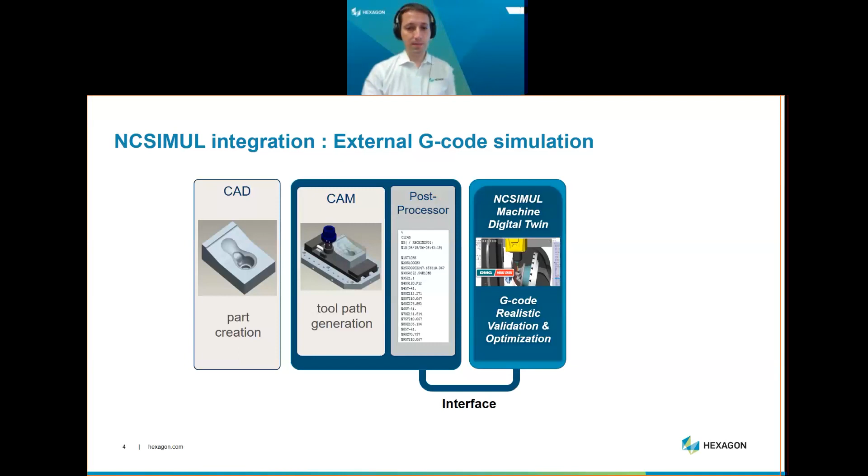And this is where we can provide the missing brick between the post-processor and the final CNC machine. The missing brick is going to be NCSimul Machine, digital twin. We are going to talk about a real digital twin because we are going to have a copy of the real machine inside the digital world.

And this is where within Hexagon, NCSimul is the brick that will connect the real world to the digital world with G-code, realistic validation, simulation, and also optimization of the CNC programs that you are going to run on the machine. And of course, this is also interfaced with the CAD/CAM world to be able to get automatically all the information, all the data that is requested.

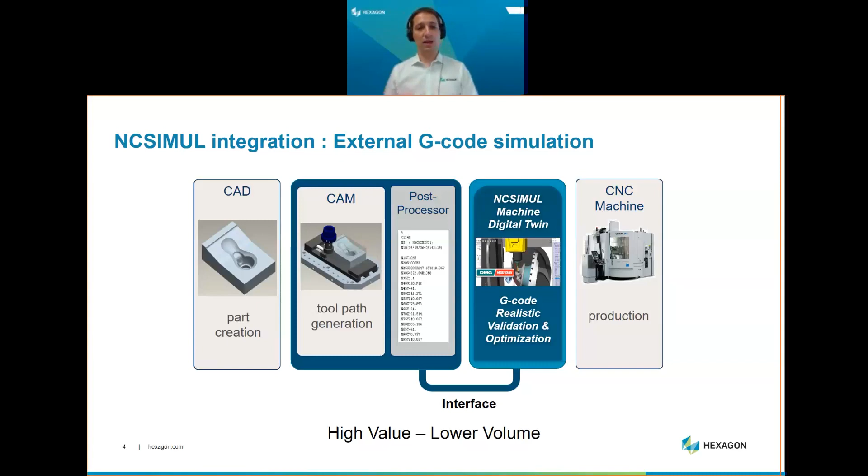What kind of user is using NCSimul on a daily basis today? We have different kinds of users, from SMEs, very small companies using one 5-axis simultaneous machine, a 3+2 axis machine or more complex, and also big groups with more than 100 CNC machines running every day in different markets: aerospace and defense, heavy industry, medical devices, industrial equipment, automotive, consumer products, where we see the molds and dies, depending on the complexity of those machines.

The common link here is that all those customers are using CNC machines and need to make sure that the programs they send to the machines are okay and right the first time. And this is why we decided with Morgan, who is going to be our technical host today, to present you every month one standard machine that you can bring into the programming department to check and validate your programs, and make sure that for your new CNC machines those programs are valid for production.

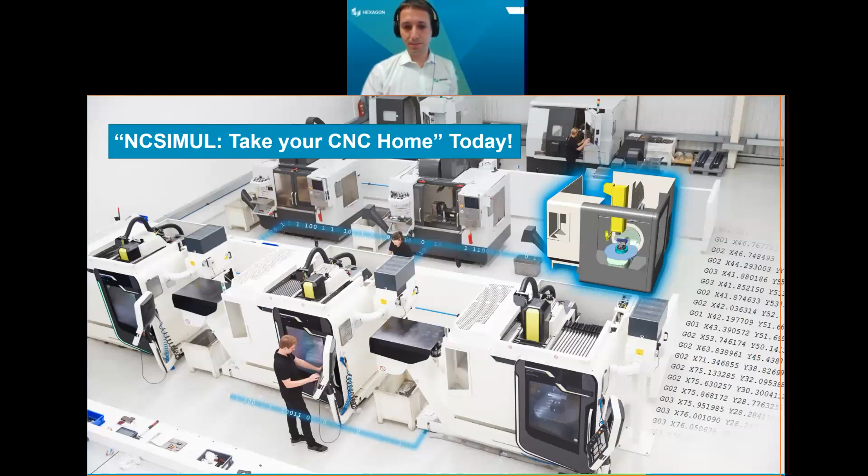And what we are going to have this month is a new DMG DMU50 machine, CMX50U, and the DMU50 third generation, which Morgan is going to explain to us. And regarding the NCSimul integration, from the feedback that we get directly from customers, the goal is to eliminate long shop floor prove-outs.

They are not to go run the machine and keep it only for production, not to have to dry run, not to have to prove out the parts and all the issues that this can bring during the prove-out campaign or test campaign. And reduce the new machine setup time.

Of course, when we want to send a new program to a new machine or a new program to an existing machine, we need to put the clamping system, we need to put the mounting on the table, the rough stock, the cutting tools, everything needs to be ready before providing the first article. Here, what we are going to be able to do is to do it offline, which will, of course, gain a lot of time and gain confidence for lights-out machining,

to have the machines running unattended and as long as possible. Of course, we are going to help on avoiding costly crashes and downtimes. And finally, ensure that each and every one of the programs that you are sending to the workshops are okay without any issues, to push the green button as fast as possible.

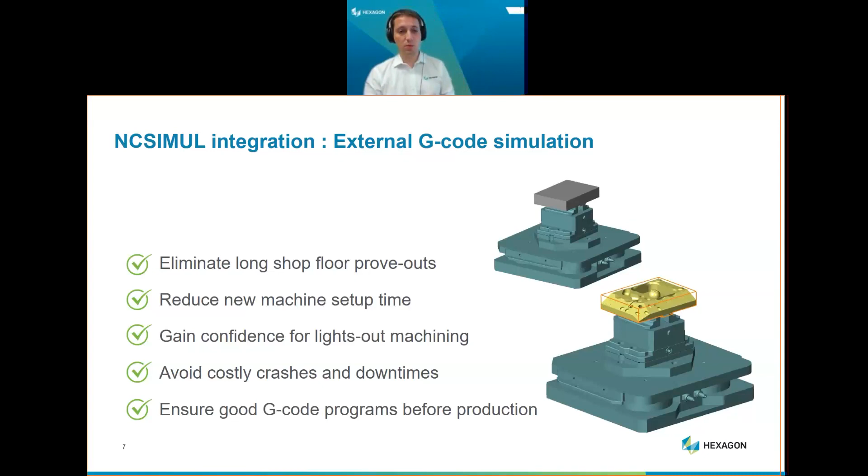Now, to talk a little bit about DMG, I'm going to invite Morgan to explain to us technically what we are going to talk about regarding those, I would say, 2 types of machines. Yes, thank you, Eric.

So to have a few words quickly about the DMG DMU50 here. It's, as Eric explained, a well-known machine. It's a 5-axis milling machine with a rotary table. So the 2 rotary axes B and C are on the table. The DMU50 is quite a small machine, so for small to medium-sized parts, and it's quite cheap. Also, it's the first price on the DMU series.

The CMX machine is also quite close to the DMG DMU, but the CMX is less known than the DMU series. But yes, those machines are quite similar. And so they are well known, and we see them a lot in workshops throughout the world because of their small size and being quite cheap, so quite popular in the workshops.

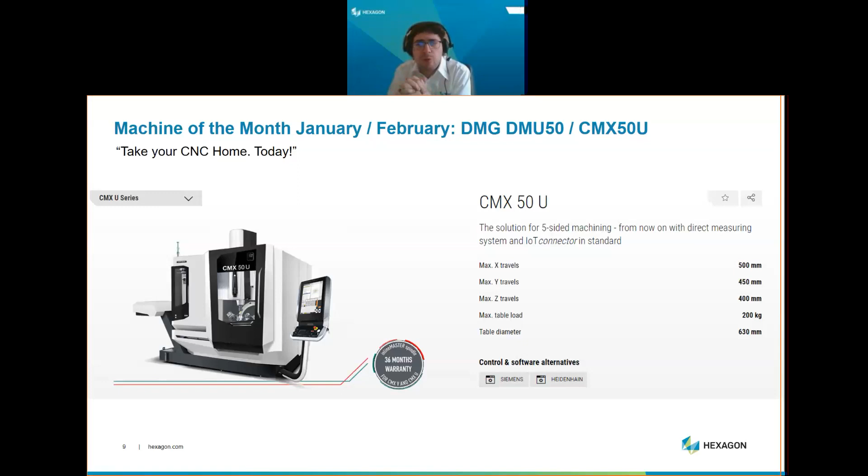And they come with 2 different controllers from DMG Mori, either Siemens 840D or Heidenhain, here TNC 640, for the newest one. And within NCSimul, we can, of course, simulate both of them. So the controller doesn't matter. We will see that later. So that's it for the controller. Perfect. Thank you, Morgan.

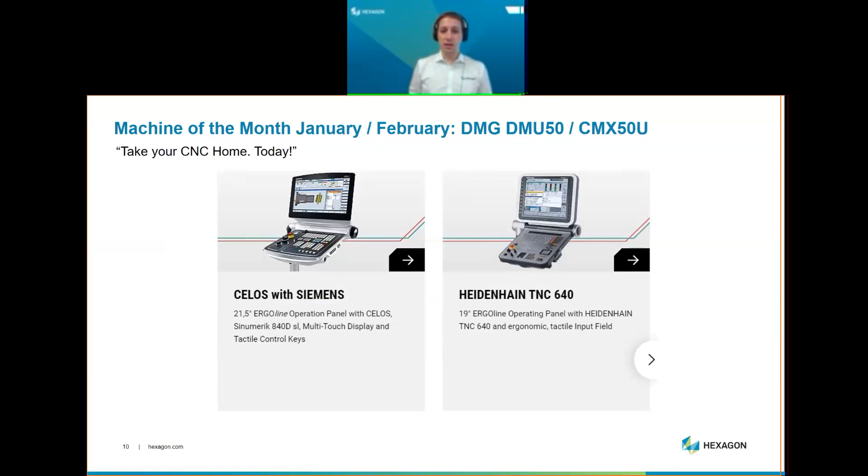So this is important: whether you are using a Siemens controller or a Heidenhain controller, the process is going to be exactly the same to provide the verification of your post-processor and your G-codes out of those post-processors, regardless of the controller that you are using today in the workshop. So this is what we are going to bring you today.

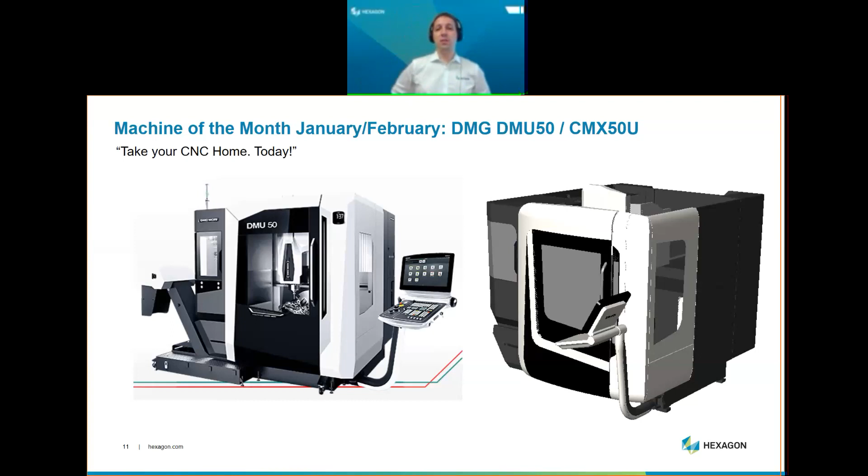DMG DMU50, first and third generation, CMX50U, and Morgan is going to demo the capabilities of NCSimul on a DMG DMU50. What we are going to see here, and the proposal that we have for you today regarding this Machine of the Month offer, is the full power of NCSimul. This is not going to be a downgraded version of the software, but for one dedicated machine tool, which is the DMG DMU50. All the features and benefits that our customers get when they do the 3-step process that we are going to see in a few minutes with Morgan will be included inside this Machine of the Month offer. It means exactly like what the operator will do on the machine.

We are going to be able to provide the NC program analysis, what we call the program decoding, to check if there are any issues within the G-code itself. The simulation module, which is basically the dry run to check that everything is fine regarding the machine environment, the controller information that we get from Siemens or from Heidenhain, machining with the non-cutting portion of the tool, cutting portion of the tool, and so on. So really to remove the material like it would be in the workshop.

And finally, dimensional analysis, which is basically to check and make sure that the part that we output from this machine is going to be okay and checked on the CMM on the metrology side. We are going to be able to check that this part has been manufactured like it was designed under the same tolerances, no gouged material or surplus material, and so on.

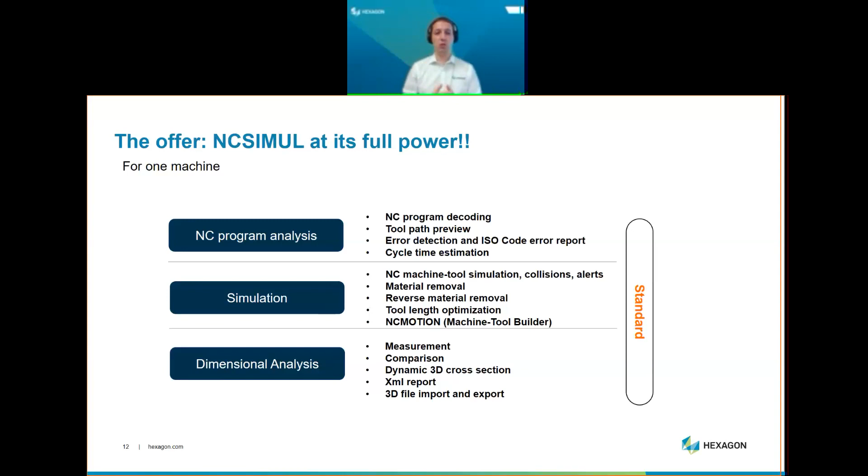So those 3 steps that we are going to respect during this demo, and in the future also all other demos, are going to be provided within this offer. And of course, plus the digital twin that we are going to provide to you inside the software.

There is also a little bit of change here because we are going to make a demo on our reception part. Basically, that is what we call the GP2R. And this reception part is going to test basically all the main functions of your 5-axis simultaneous machine or 3+2 axis to check that they are all being supported.

So we are going to be able to test the basic linear and circular movement functions, tilted planes, 5-axis continuous motions, machining, polar machining, multiple compensation, radius compensation, helical interpolation, and so on. Everything will be within this part so that the machine is robust and can read and check basically all the programs that you will put through.

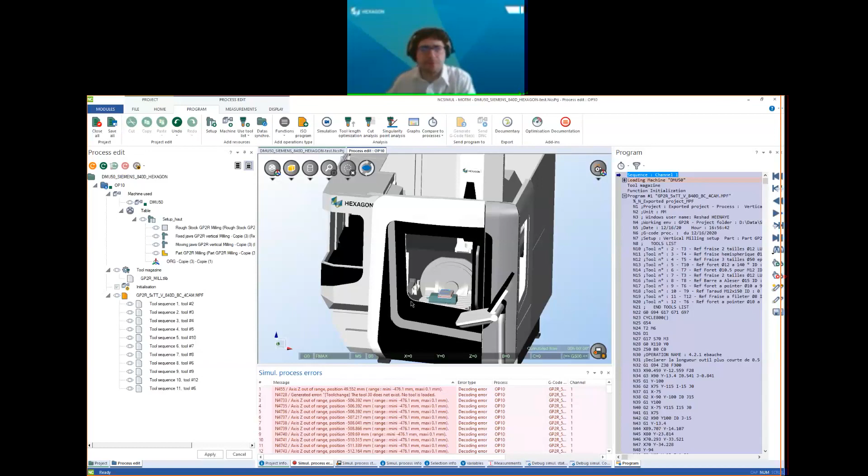So as Eric explained, here we are on the NCSimul environment. For the example, we came from HCAM and interfaced everything directly automatically inside NCSimul. And here it's the state where it comes in. We have our machine here and the 3D model of our DMG DMU50. On the left, we have all the resources of the project. So directly retrieved from the CAM system the setup, which regroups the rough stock, the clamping system, and the finished part, the actual CAD model of our part.

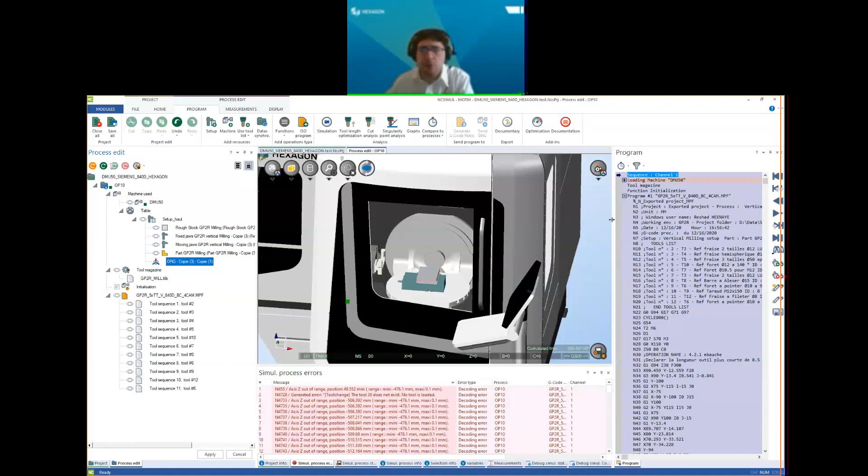Also, the origins. So all the axis systems created in the CAM system will be retrieved with the CAD models. Then the tools, and finally our NC code, which we will also find here displayed on the right. And in this window, I can navigate through my NC code, and as you can see, I have my trajectories and my spindle moving through my part.

But you can notice that I don't have any material removal because we explained that the simulation in NCSimul is in 3 steps. This is the first one, the decoding, and here there is no material removal. It's only reading the NC code. As the real machine will do when you load the NC code on it, it first reads the whole NC code and detects errors, mostly of syntax.

So the errors that we will find here will be either unknown codes or forbidden functions, unknown functions, or out of bounds. So here we have some out of range, for example, on the Z-axis. It can be out of speed of the spindle. It will be some errors on the tools or the axes, all this type of error that the machine can find before the material removal. So this is step 1 of the simulation. And the goal here will be to fix all those errors to be able to move on and go to step 2.

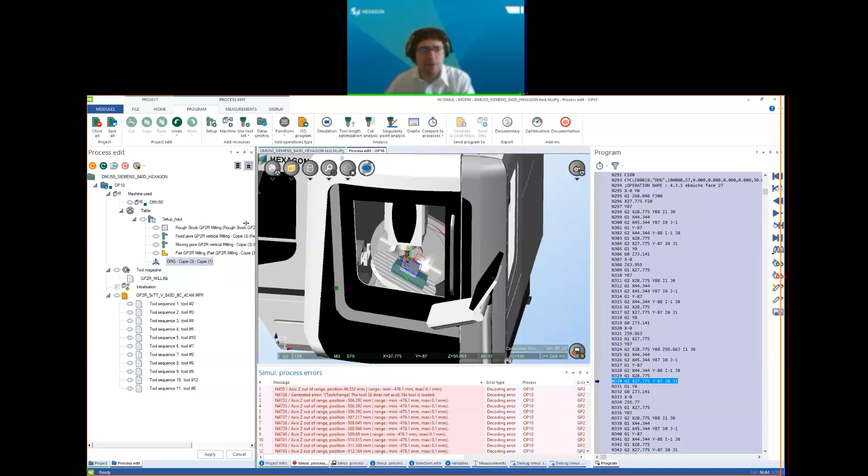During this presentation, we will see all the functions that are available in NCSimul, because as Eric explained, through this campaign, you have access to the full NCSimul functions, and we'll try to check on all of them. So we will fix the errors of our NC code because there are some and that is not good. We want to be able to send a right NC code to the machine.

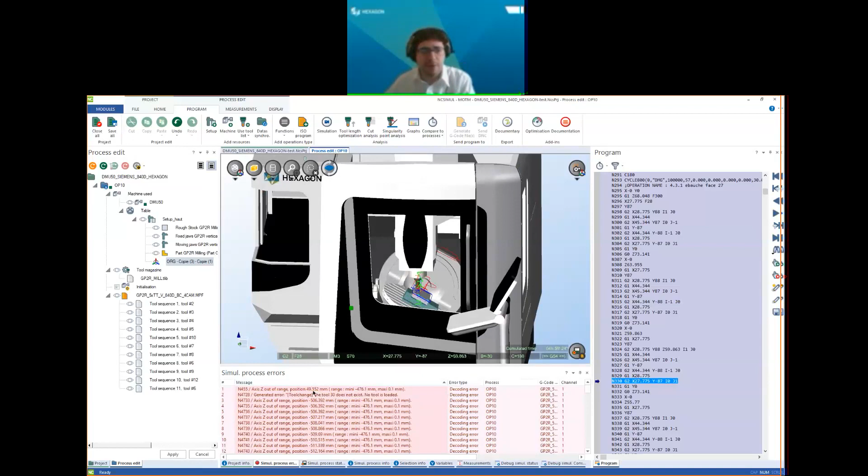So to do that, we just click on an error. In NCSimul, at all times, all the windows are synchronized. So when I click on one, all the others align with it. So here I click on my error and my NC code and my 3D window show me where the errors happen. And as you can see here on this retract, we are too high. So we have an out of range on the Z-axis, 50 millimeters too high. So we just move down the retract just a little bit.

To do that, we have a tool within NCSimul that is the editing mode. I will enter this mode and I can there modify my NC code freely. So what I can do is change the value of my retract. So instead of going at 500, I will go at 250.

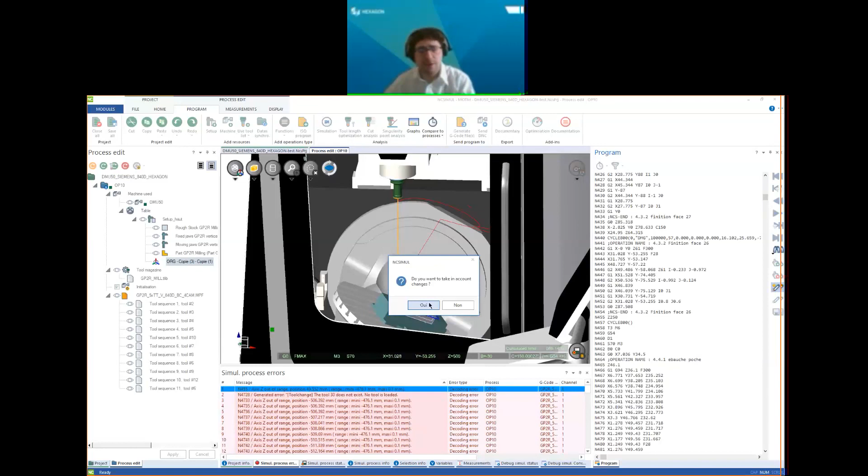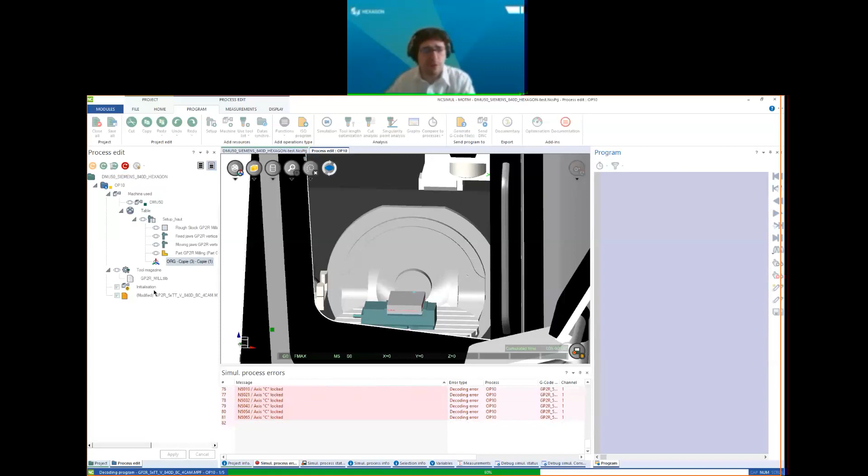When I leave the editing mode, NCSimul asks me if I want to change my NC code, and I say yes. From now on, as you can see here on the left, my NC code has a tag named modified, which means that I am now working on a temporary file that is different from the initial NC code. It's a new one, with my modification, and it's not the initial data. So here I can make any number of changes I want on my new NC code. We won't rewrite the initial one to keep the data.

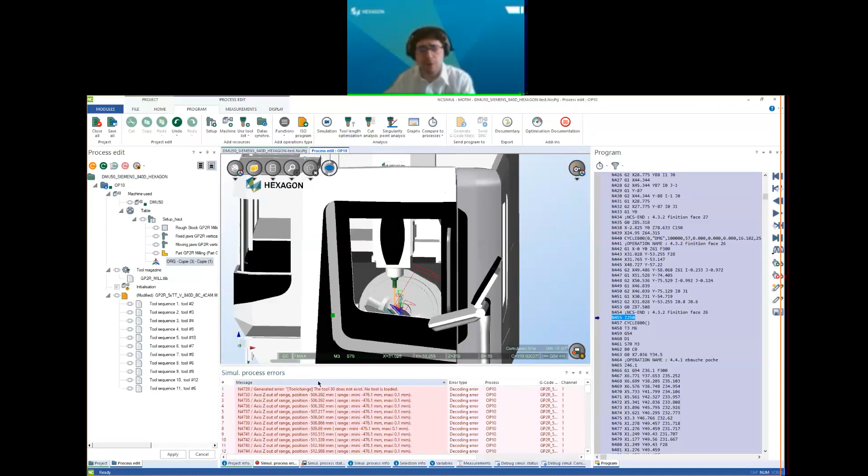But NCSimul reloads my new NC code with my changes, and I can instantly check and see the changes. So here the retracts were too high. As you can see, my first error is now about the tool, and the retract out of range is gone. So we can validate our modification. It didn't trigger another alarm, so we are good. And this way, error after error, we change everything and solve all our errors.

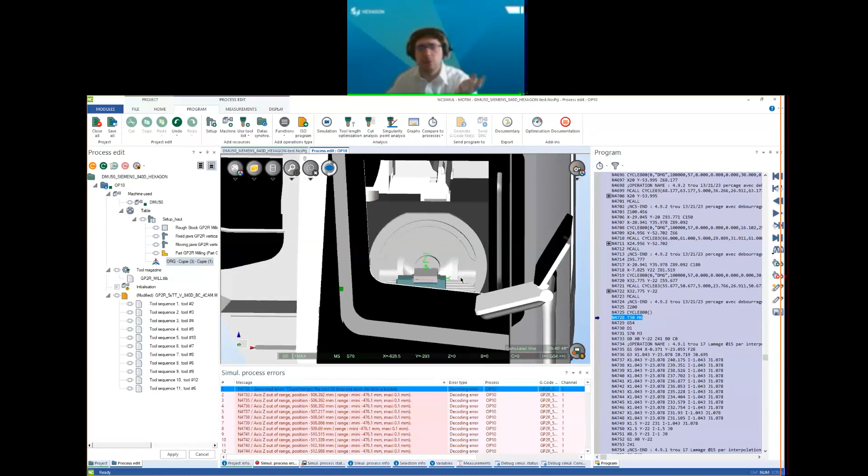The second one, tool number 30 does not exist. So here, I call a tool number 30 in my NC code, and actually in my tool library, the tool number is 3. So there is an inconsistency between the NC code and the tool library. We need to make it right. We either change it in the tool library or the NC code. Here I will modify it in the NC code, the same way I did for the out of range.

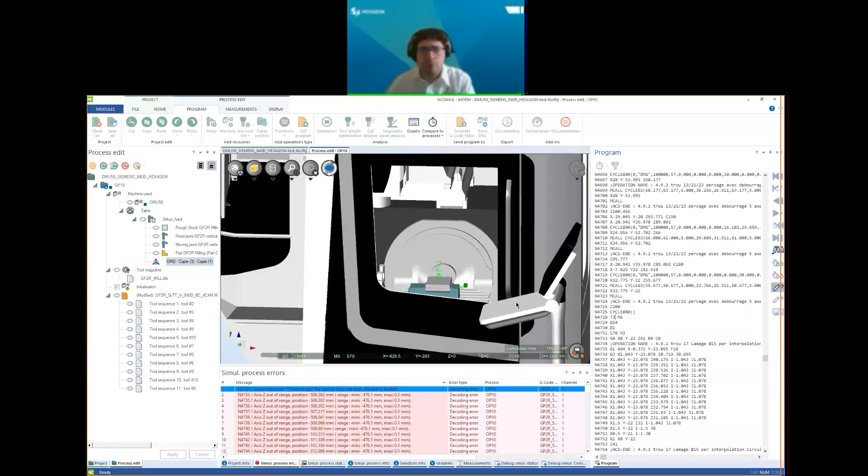I enter the editing mode, change the number of my tool, and reload with my modification. So now I should call the tool number 3, which is actually inside my magazine, so this is fine. My first error was about the tools and now should be gone, and as you can see, it's good. And we can move on to the next error.

So those errors are about the rotary axis. As you can see here, we try to move the rotary axis and NCSimul tells us that they are locked. If we look here before this comment, which is the end of one operation, at the end of the previous operation we locked the rotary axis with those codes, M10 and M22, and we didn't unlock them before trying to do the other 5-axis operation.

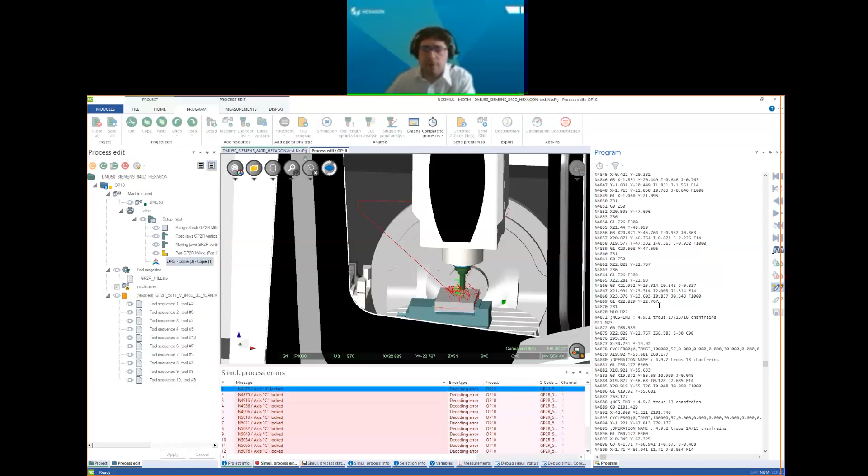So here, what we need to do: either I remove my clamping codes, or at the beginning of the next operation, I unclamp my rotary axis using the codes for that, M11 and M23. And I will reload now with my unclamping code. And now everything should be fine. My last error should be gone. So we let NCSimul reload and verify everything, but here we should be okay. As you can see, we don't have any errors anymore.

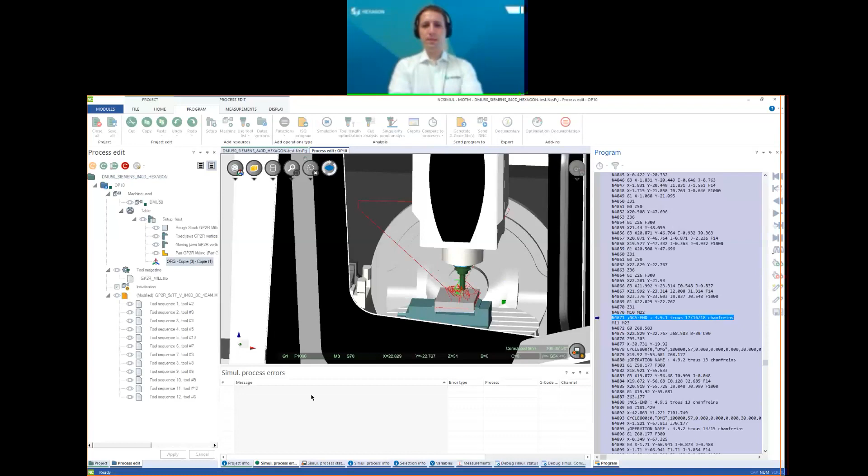The program seems fine. So this concludes step 1 of the simulation, the decoding. The machine read the entire NC code. It looks okay, and we can move on to the next step. Thank you, Morgan.

So this is a very important step, and this is why we separate verification and simulation: once the decoding is done, we don't need to go back to it, and then we can start the simulation. Like the operator would do on the machine, I take my part, I put it on the machine, and then I dry run. I check this part. The only difference is that we are going to do it offline, and it's a little bit better to crash the machine on pixels here in the software than on the real machine.

So this is where this part of verification is important, because if you do it directly on the machine, then the machine is idle, waiting for correction, and you are going to have back and forth travels between the programming and the machining department.

Here, it's also very important that, as we can see on the right, you can directly key in or change the NC code from the window that Morgan just showed us, and check in real time what it does in the real world. So this is also a very important and informative tool to understand what is going on on the machine when I change this parameter or that parameter. And this goes, as Morgan said, to step number 2, where we are going to make some chips and remove material.

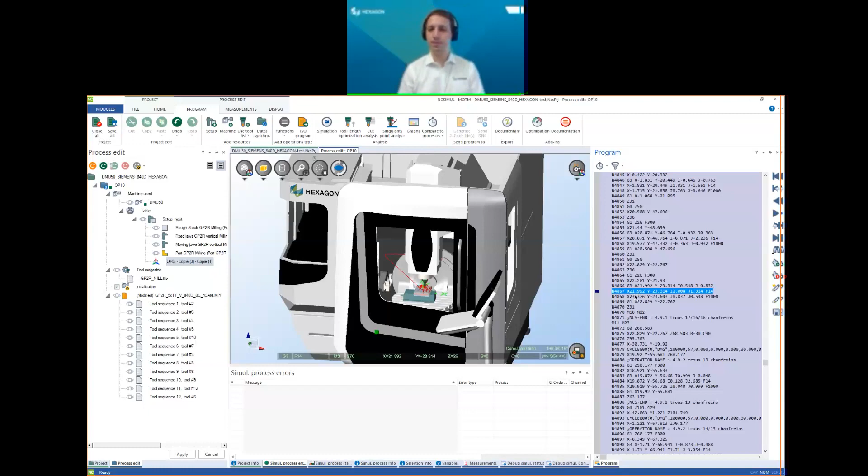So now we can move on to step 2. Step 2 is the simulation or material removal. Here we have the simulation mode, we can enter it, and the simulation is pretty straightforward. We have a play button, we just press play, and the simulation will go on to the end.

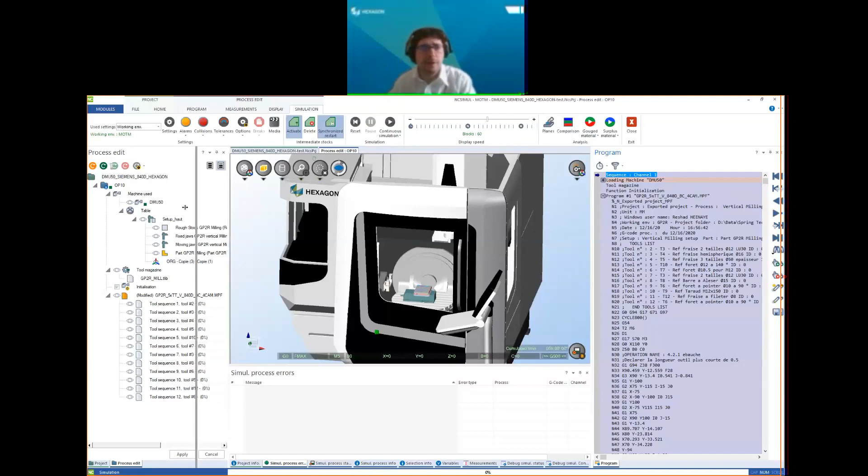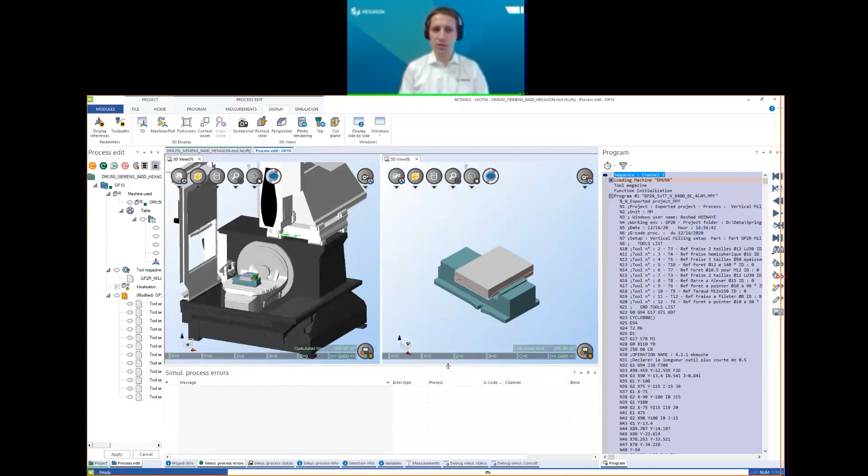I will add a new 3D window and see the machining go on the part. I will hide the door of the machine so we can see the spindle moving and all the movements. You can customize your environment to see what you wouldn't see on the real machine.

Yes, in NCSimul we can modify all the 3D windows. You can switch between machine view and table view, and have multiple 3D windows, that's okay. For the 3D models of the machine, we deliver them according to customer wishes, since everyone has their own needs. Some people like to see the doors and steel flanges of the machine, some just like to see the minimum. Everything is fully customizable, and we change it all the time.

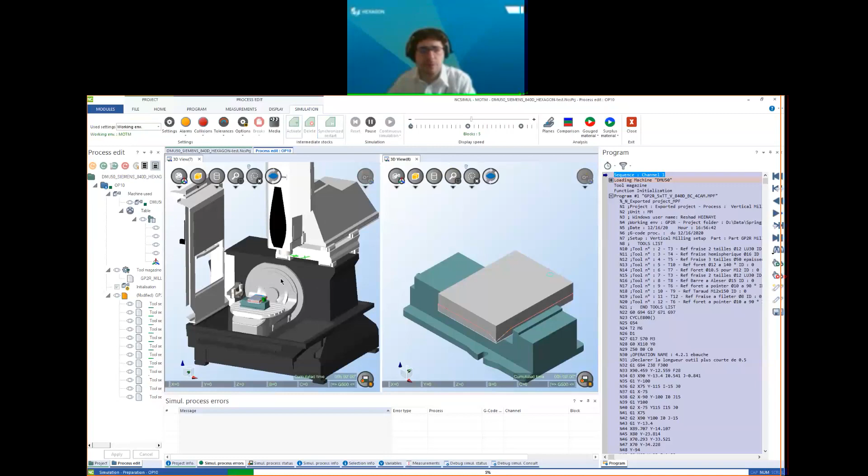Now I will just press play and we will see the simulation. All the windows will be synchronized when the simulation starts. Here I will hide the trajectories. We have the NC code running in both 3D windows, and as I said, it's pretty straightforward.

Here we have a speed bar, we can speed up or slow down the simulation. The simulation will go to the end until there is an error, and that will be displayed here on the bottom.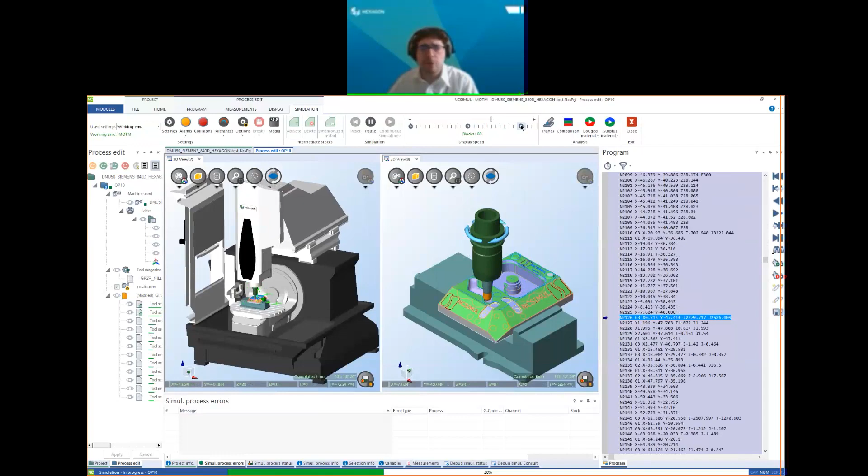I will speed up the simulation to show you: after the end of the speed bar, after this small cross, we are in end result. Here it means there is no display anymore, we don't check anything on the display, but NCSimul will calculate the simulation much faster, and we will just have the report of the errors at the end.

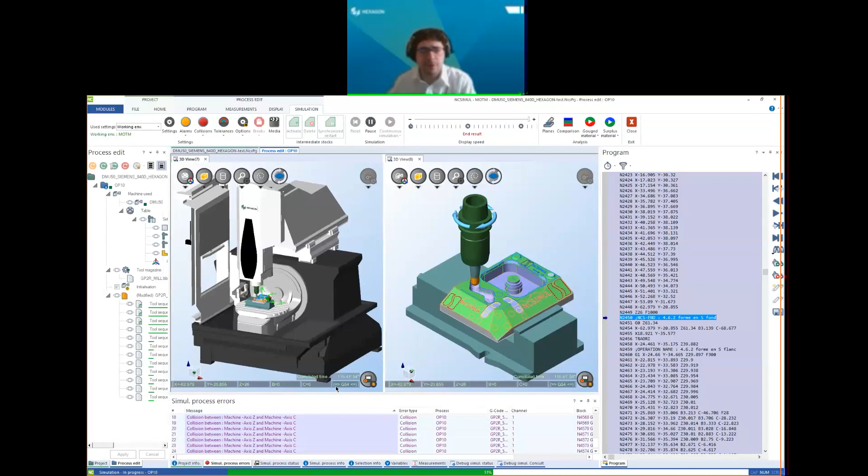So this is what we do. Here we can already start seeing some errors at 50%. You can slow down the simulation to check on it, or speed up again, or just let the simulation finish at once. You can move the 3D window during the simulation, that's okay, it does not trigger anything. Just wait for it to finish.

After this, I will also show the second simulation mode, which is the break option simulation, in which instead of going to the end of the simulation, we stop on every alarm. That's easier to solve all the issues.

So here we have lots of errors at the end. The more errors you have during the simulation, the longer it takes, so that's why at the end it slows down, because we have lots of errors.

So yes, here NCSimul is removing all the material and checking for all those issues during the machining. We can see that the 3D window is not moving, it's to get the result faster as end result, as Morgan just explained.

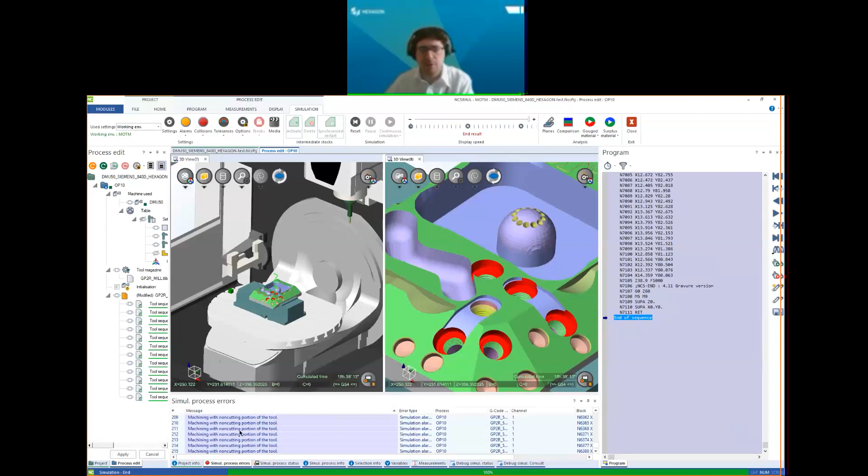So here we have the final result of the simulation and the report of all the alarms. We have over 200 errors, that's way too much. You can see directly on the rough stock the red areas, which means we have a problem. So probably this is machining with non-cutting portion of the tool. I will go back to the first error, and the same way as step 1, error by error, we will fix our NC code to have a machining without any errors.

Just as a reminder, during the simulation we detect two types of errors: the collisions, shown here in purple, and the alarms, shown in blue. The collisions are collisions between elements of the resources, the project - so either the tools and the table, or the tools and the fixtures, or any elements that can collide with each other and trigger a problem. NCSimul will display that.

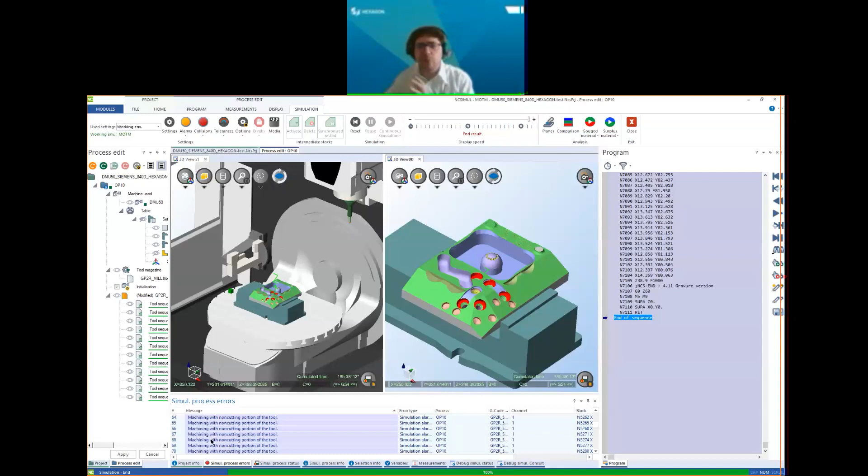And for the alarms, it will be more machining issues - it could be stop spindle in the material, it could be G0 rapid motion in material, or machining with a non-cutting portion of the tool. All those types of machining issues will trigger a problem on the machine, but they are not collisions.

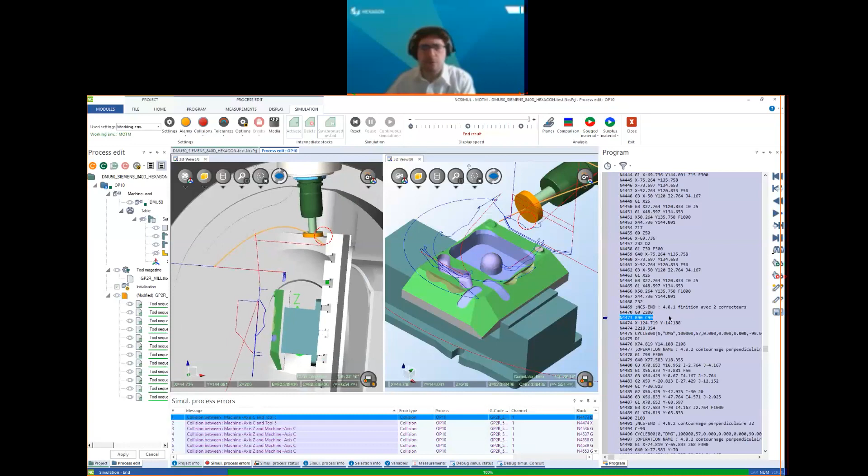So same way as I did for step 1, I will click on an error and see what happens. So here, if I show my toolpath, as we can see here on this move, we move the rotary axis, and our tool collides with the table here. So that's not good. And here we have the same issue, but instead of the tool, it's the spindle that is actually going on the table.

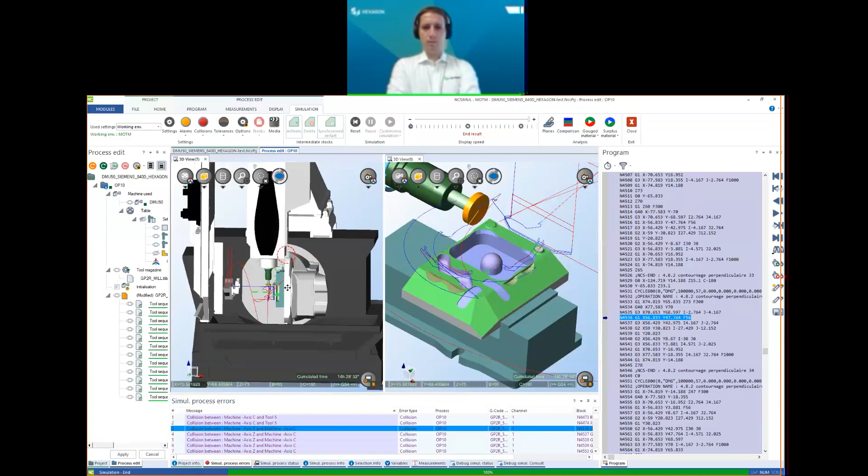So why does this happen? It's because here on our setup, the clamping system is too low on the table. If we were a little bit higher, the tool would go over the table, and that wouldn't be a problem. And here, if we were higher on the table, the spindle would have an offset with the table, and the machine would be good.

So here we need to change the clamping system. We are too close to the table for the spindle, and that's not good. So we can do that quickly within NCSIMUL. I will just close my simulation first.

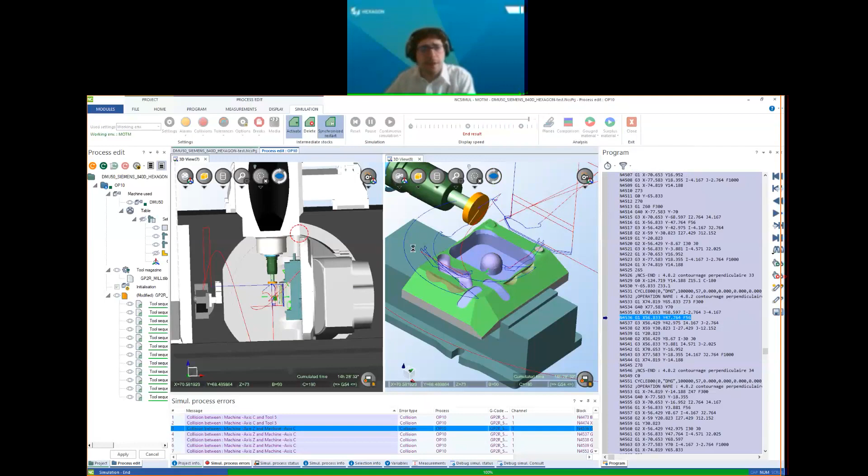We have already imported in this project the new setup, the new clamping system we will use. We should create a new one, but here it's already created. That's what I wanted to say. So here I will, sorry Morgan.

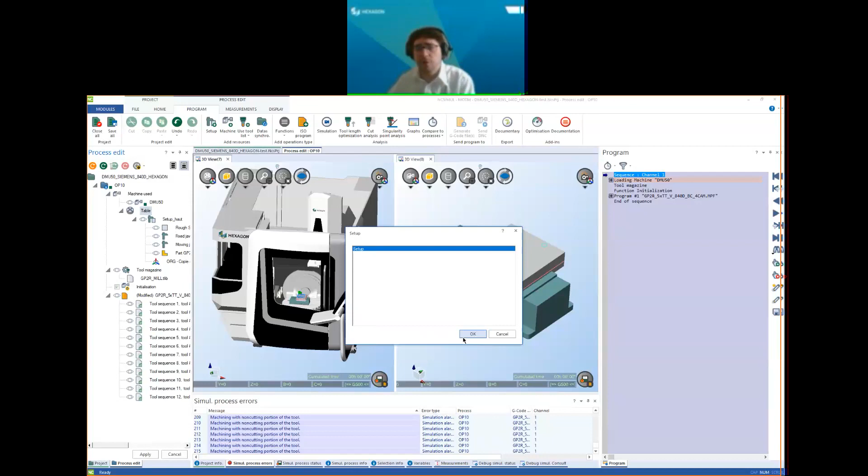How many setups can you define here? So here I have the list of all the setups of my project. I have only one, and the one that is already ready. And we could have any number of setups here. So I could define 100 setups if I wanted, it's the same.

So here I input it on my table, the new setup. I will remove the previous one. And as you can see, we have now a much higher setup, much higher clamping system. Only thing we need to do is update the origins because the axis system was on top of the part here, and now the part is higher.

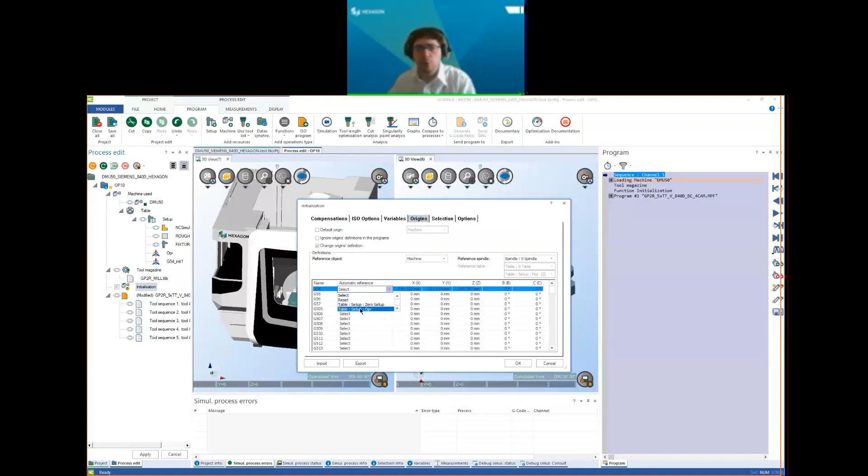So as I explained earlier, all the axis systems are retrieved with the CAD models of the file. So here, my G54, I just need to update it with the new models. And here, NCSIMUL will reload with the new origin.

And we should have the same machining, but at a higher height. We'll let step one reload because here, the new setup could trigger, for example, since we are higher, a new out of range. And NCSIMUL just reloads step one to verify that everything is fine. Everything is good. We can go back to the simulation.

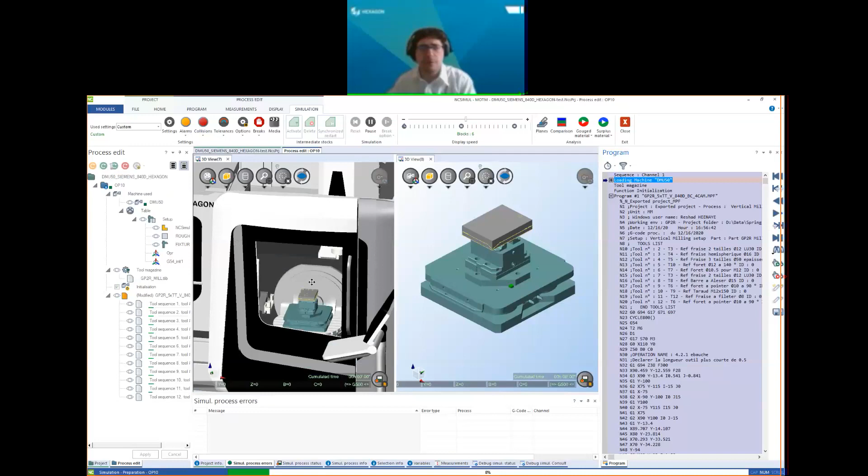For this simulation, I will use the break option, as I explained, the simulation that will play until there is an alarm. So the same simulation, I can zoom in, same simulation, we see everything. But I will just go to the end result as before. We'll run everything and wait for the alarm. The simulation will automatically stop on the first alarm and show me what happens.

We'll wait for it. The first alarm was the collision between the tool and the table, if you remember. We solved this normally, so we should go over it. And we will wait for the next one to show up on the list.

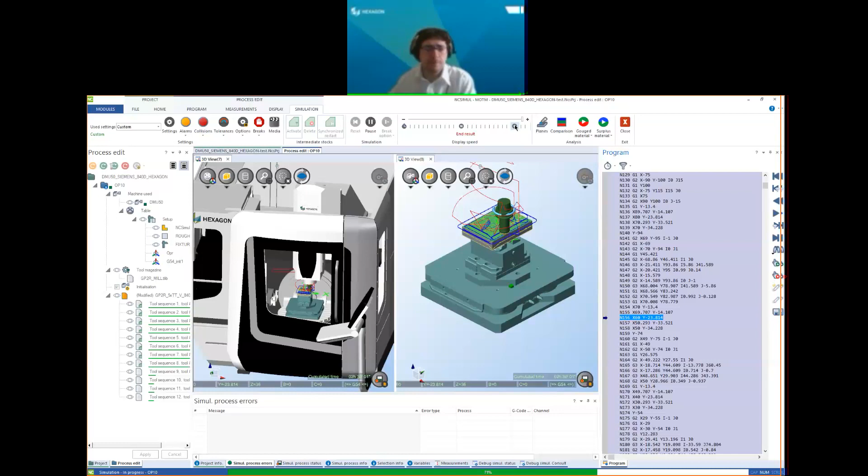Here, we have the next error. So here we have machining with a non-cutting portion of the tool, so we can check what happens. So here, the threading and the holder goes inside the material. Okay, so this is why we have machining in red. And to avoid that, actually here the problem is that the tool is too much inside the holder. We need to update the tool length under the holder of the tool.

To do that, with NCSIMUL, we have a useful function called tool length optimization. And this function actually calculates the minimum tool length under the holder needed for this machining to not trigger any alarms, collision, or anything.

NCSIMUL gives us a table here for each tool. At the moment, the current tool length under holder that we have for each tool, and the minimum needed. If we reduce the value of the tool under holder, we reduce the vibration on the tools and possible breakage or any issues that could happen with it. So that's a good option for us.

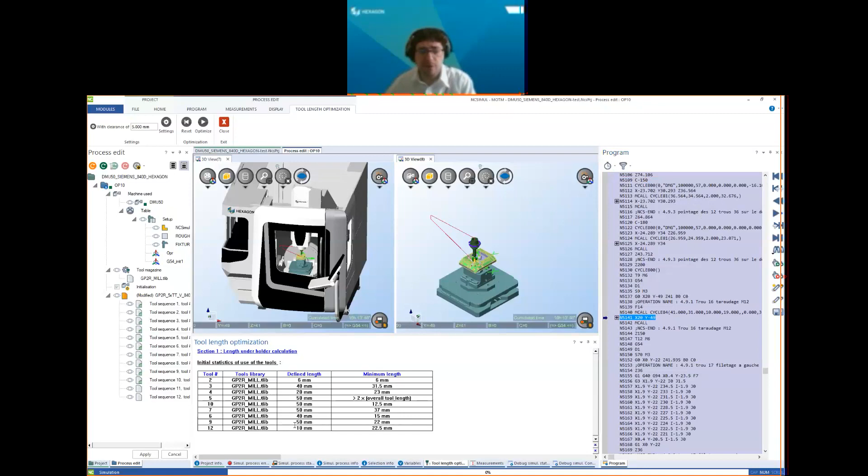For example, here, our tool number 9, we define it at 50 millimeters, and we actually only need 22 millimeters under holder. So we can reduce the forces on the tool by reducing its tool length.

Okay, so we could update this tool length, for example. And the tool that triggered our alarm was the tool number 12. And as you can see, we defined it at 10 millimeters, and the minimum needed is 22. So here we have less tool length than needed. So we need to change it up.

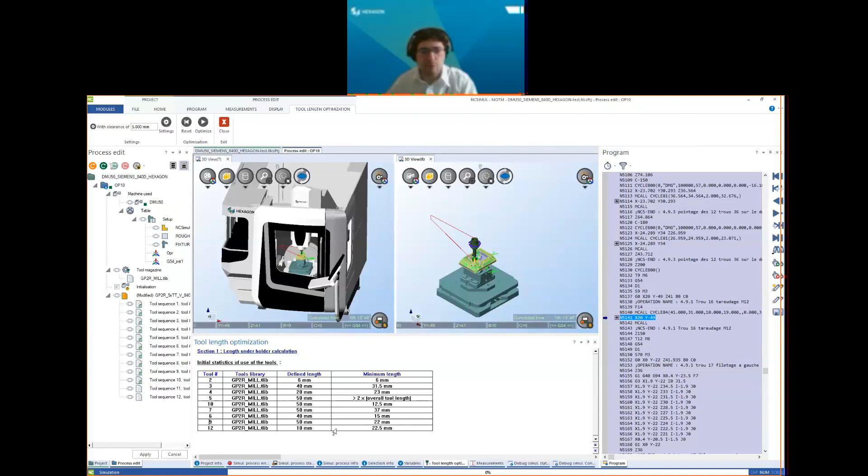So to do that, I will modify my tool. So I will modify my tool number 12, okay, to be above 22.5. So I will close this function.

This function does not update the tool library automatically. It's just a reminder. You are free to change your tools or not, as the programmer and the operators feel if they need or not.

We'll enter the tool library and modify our tool number 12. This was our tool that is too much inside the holder. Inside the tuning function, we have length under holder. We need to be above 22.5 millimeters, so I will set it at 30, and I will also update my tool compensation, adding 20 millimeters to it.

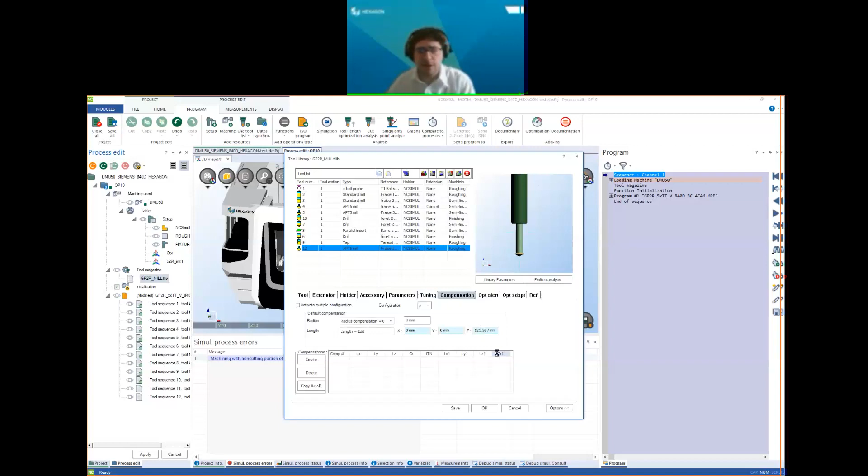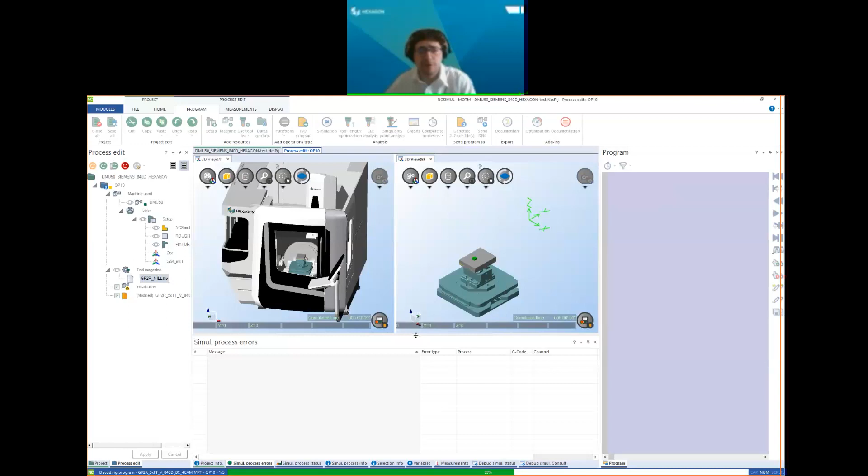I will save my tool library, update my project with the new one. Here, NCSIMUL will reload everything one more time to check if there is any error with the new tools, and we will be able to go back to the simulation. One more time, if there is no error, everything is good.

Simulation. And we start again with the break option. So here the simulation will run until there is an error. If there is none, it will go to the end. That's really so I will keep the break option, the end result, to go faster.

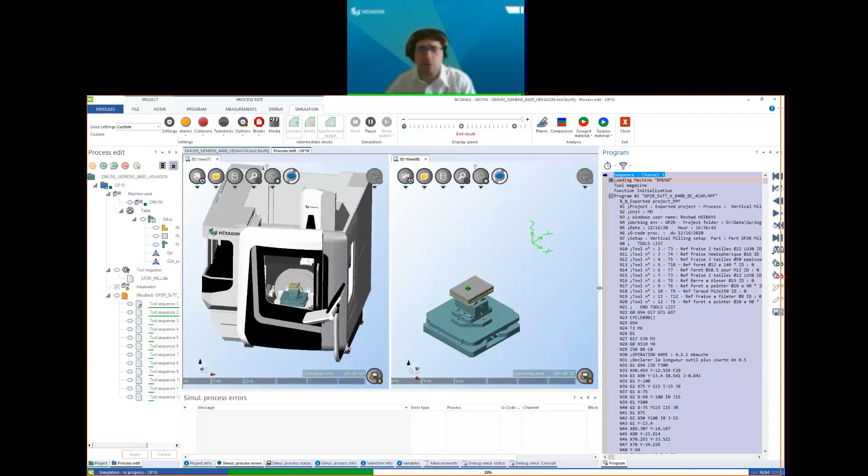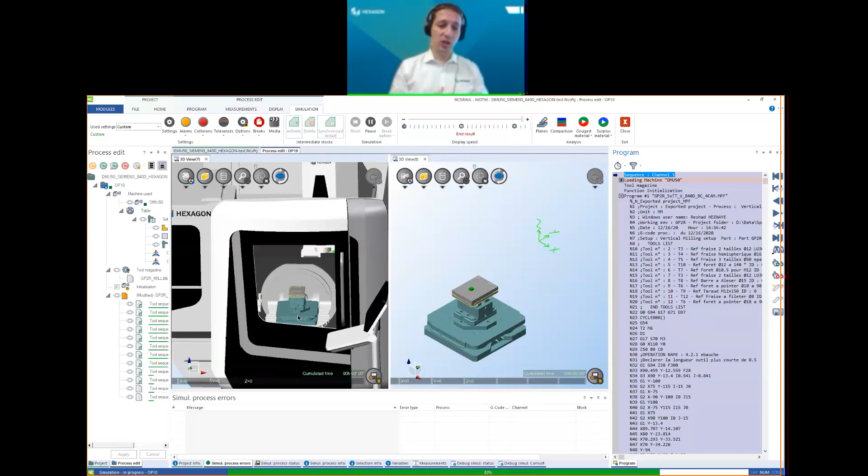Just to finish that step number 2, where the operator would have machined this part directly on the machine: we know that at the end of this step, the program is right for machining. It's okay to go on the machine and push the green button, because one, there is no decoding error, which is a very important point, and two, there is no errors or issues related to the machine environment, the controller, or the cutting tools and so on. So at the end of the sequence, my part is okay for manufacturing.

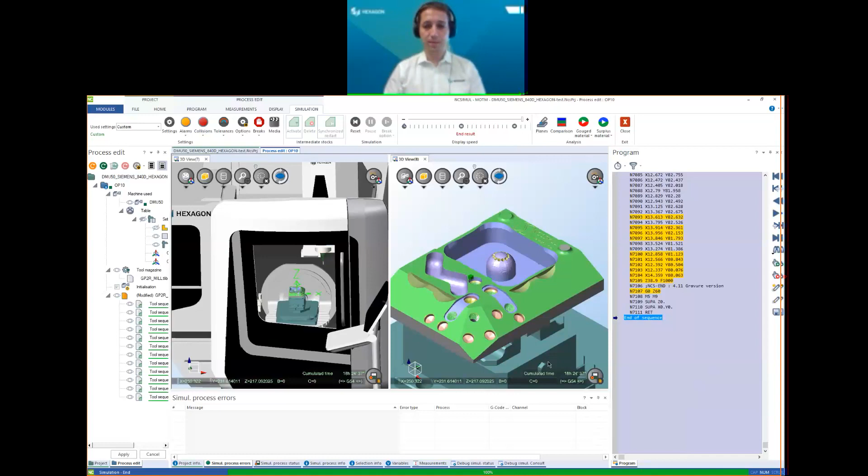Now I need to make sure that this part is okay to deliver to my customer. So this is the third step that Morgan is going to explain. Yes, exactly. So here we have the finished stock that we have machined. There is no error, no collision, no alarm. So as Eric explained, we are ready to send it on the machine.

Now what we want to do before sending it to the machine is to know if what we have machined is right or wrong. This is step 3 of the simulation analysis. We will analyze our machine stock to verify if we are good and close to the CAD model or not. To do that, here we have the CAD model in yellow, and the simulation will compare the actual CAD model of the part with the machined rough stock. This is the first function we have to analyze our machining: the comparison.

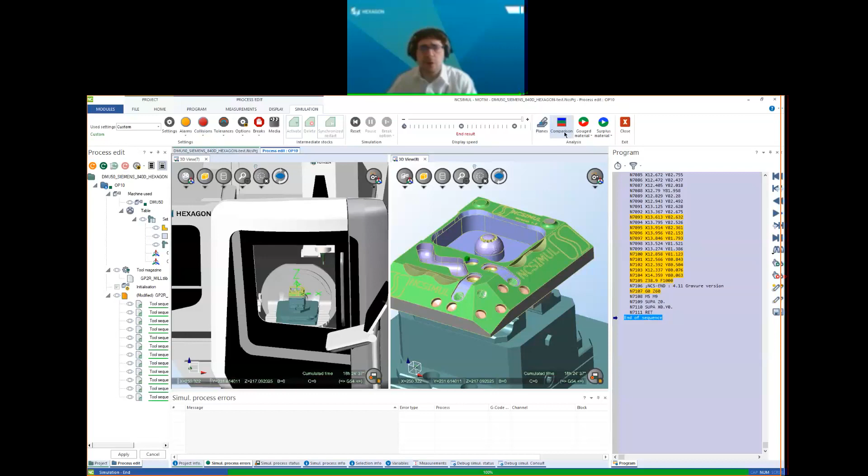When I click on it, I have a color scale function on all my parts, and I can see in blue to green the surplus material on my parts, and from green to red the overcut. I just have to select an area I want to know, for example the overcut here. I can double click on it, and NCSimul gives me the value of my overcut. Same with the surplus material, for example here. That way I can define which areas will be right or wrong. Am I inside my tolerances? Is 0.4 within the tolerance I have for my part or not? That way I can give the status on my part, right or wrong.

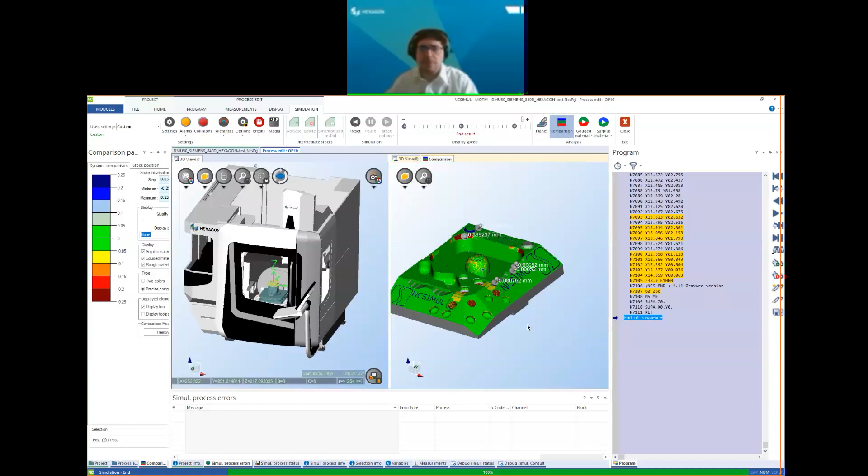This function is okay for small to medium parts, but if you have a really large part, you don't want to go over 2 meters of the part by double clicking on all the surface. So in those cases, we also have two other more specific functions for more specific needs, for example large parts, which are comparisons for only gouged material or only surplus material. Each one of them will detect only one side of the material, and they are more specific, so the calculation will be longer.

There is a new simulation with higher tolerances to have higher results, and NCSimul gives us a table of all the points and all the lines in the NC code where we have either gouged or surplus material. We can click on them, and the 3D windows are synchronized, so you can detect where you have your surplus or gouged materials. So those are for more specific needs, but they are present and available here.

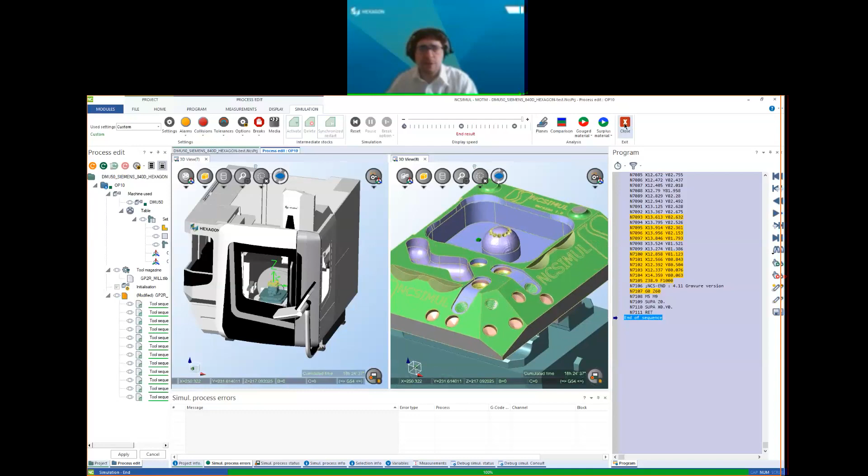And we have also another function that is quite useful to detect any issues on the machining. It's actually outside the simulation. Within NCSimul, we have what we call the cut analysis. So the cut analysis is NCSimul retrieving all the cutting parameters from the machining, since it has all the distances, the tools, everything. We did the simulation, so NCSimul knows everything, and retrieves all the cutting parameters and gives them to us. The cut analysis is available with NCSimul directly, free of charge, so we will use it and see how it works.

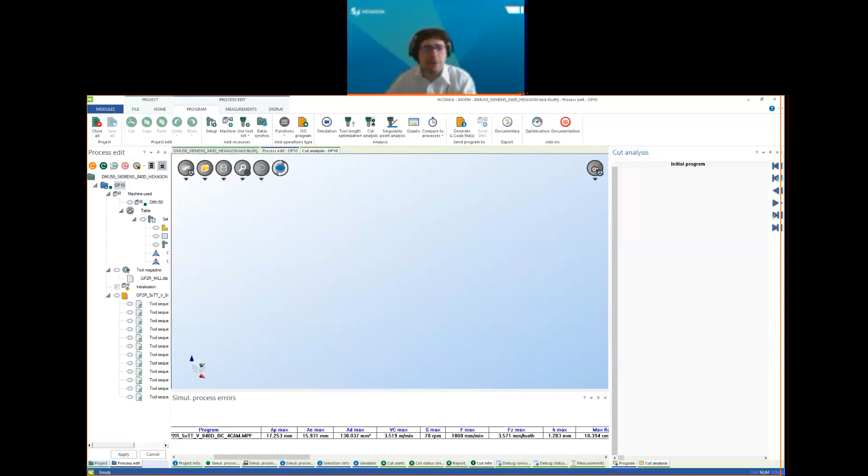As you can see here, my cut analysis, I will run it on one specific tool. I can run it on all my tools, but here I know a particular point that we want to detect on this machine. It's on my tool number 4. So let's imagine that we run. When you put, sorry, tool number 3 in the line, I think. I will check. No, it's sequence number 3, but tool number 4, that's okay.

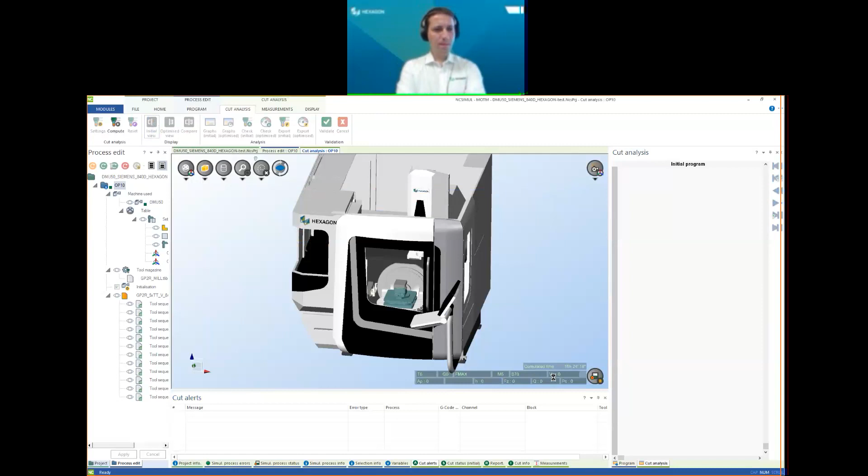Yeah, good point. So let's imagine that we run the program on the machine, and the operators detected that there was too much noise on the machine, or maybe the tool life calculated for the tool was above 10 parts, and you only machined 8 with tool number 4, and after that it breaks. Those types of errors where something is wrong, but you can't actually pinpoint what happens.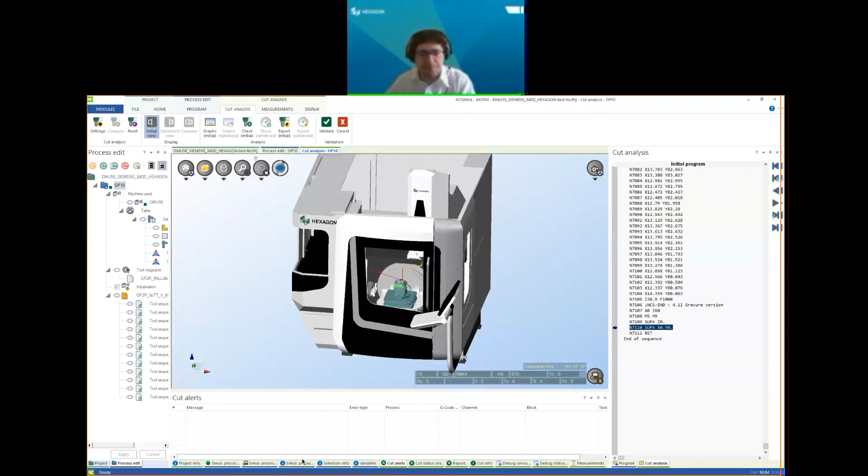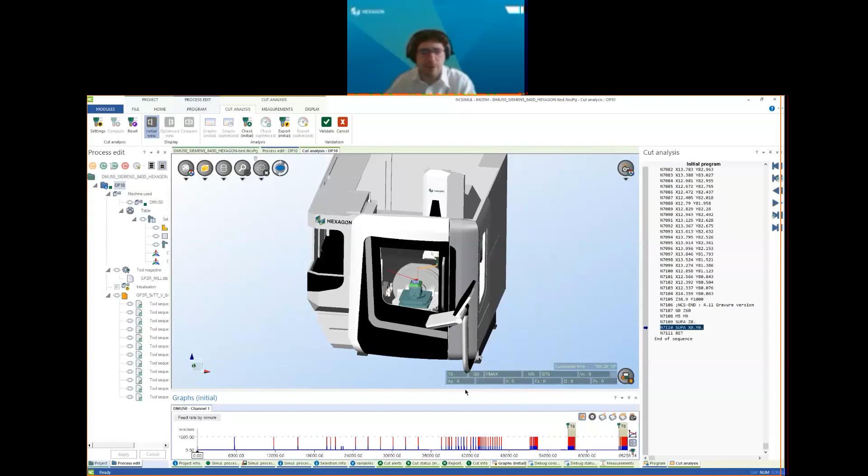With the cutting analysis, we will have all the cutting parameters retrieved by NCSimul, so AP, AE, Q, and so on. Here, NCSimul gives us just the maximum value, but we have a tool here called Graph. We can display those cutting parameters in a graph. For example, one parameter that is quite graphic and can help us quickly find areas of errors is the chip flow of material. I will show the graph of the chip flow.

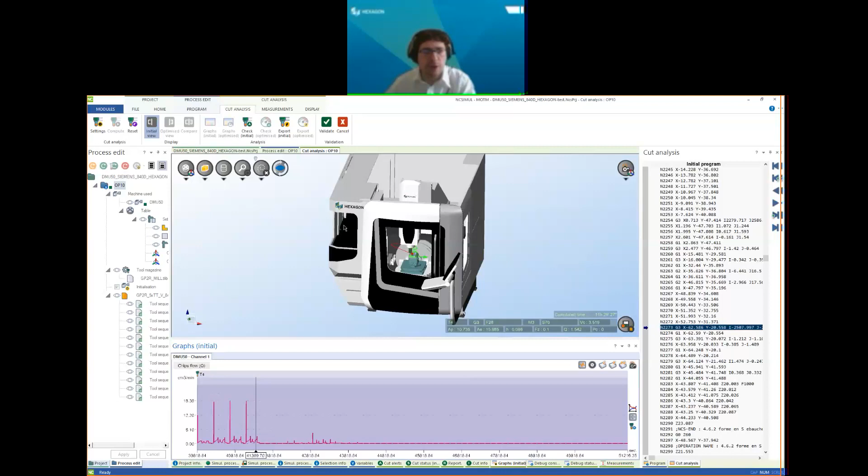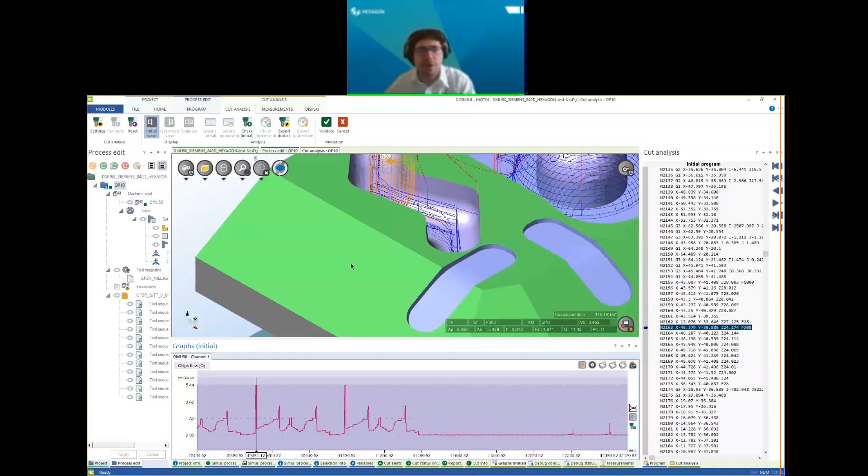As you can see here, the chip flow is constant at maybe 1 cubic centimeter per minute during all the machining. I will zoom on the machining. Every time it's constant here. And every time we enter one of the radii here on the pocket, we have a huge peak of Q, the chip flow, and maybe those peaks trigger lots of vibration, a lot of forces on the tools and on the machine, and this is why we had those issues of tool breakage or noise on the machine.

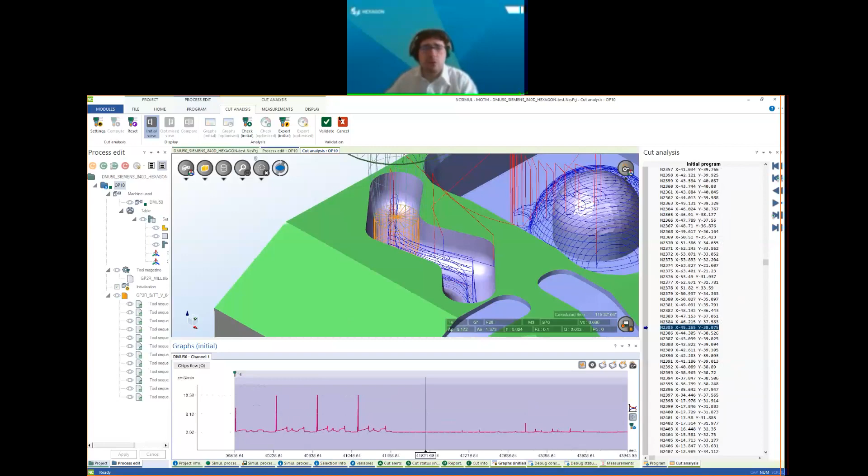Through the graph, we can quickly detect the areas where we have those errors, and maybe think of a new strategy to machine this pocket. Maybe on the CAM system there is another strategy that reduces the feed rates on the corners or something like this. We need to rethink how we programmed the NC code here. This is not a job we will do inside NCSimul, but we can detect it inside NCSimul to change it afterwards and have better machining on the real machine. So this is the cut analysis, and this concludes step 3 of the simulation, the analysis to detect what is wrong on the part and where we have something to change.

And with this, we have seen all the potential of NCSimul and what we can do with our machine of the month. Nice, thank you, Morgan. So yes, it's the end of the 3rd step, which basically gives us all the information, all the tools, and all the experience from NCSimul, from the workshop, and from the programming department to send validated and simulated programs to the workshop.

Now I am here in Siemens 840D. Morgan, if I have a Heidenhain controller, this is not the code that I see in my machine. Is the process the same? Is it working the same way? Yes. As we explained earlier, the machine comes with 2 different controllers. Here I use the Siemens one. You can see here the Cycle 800.

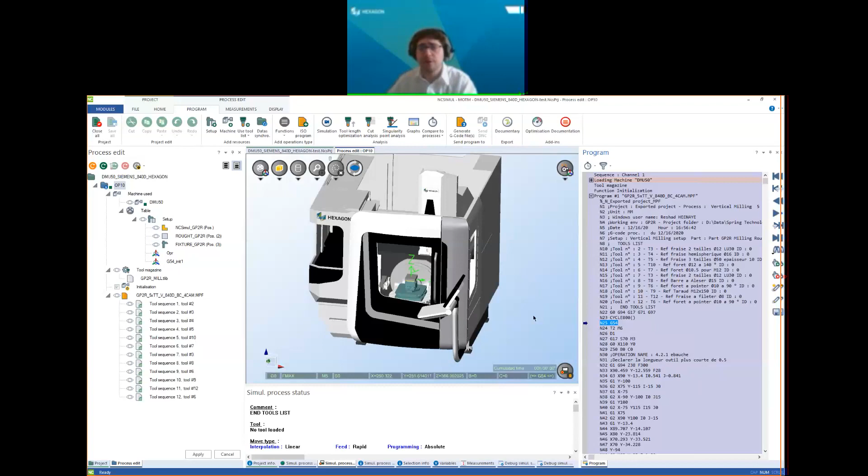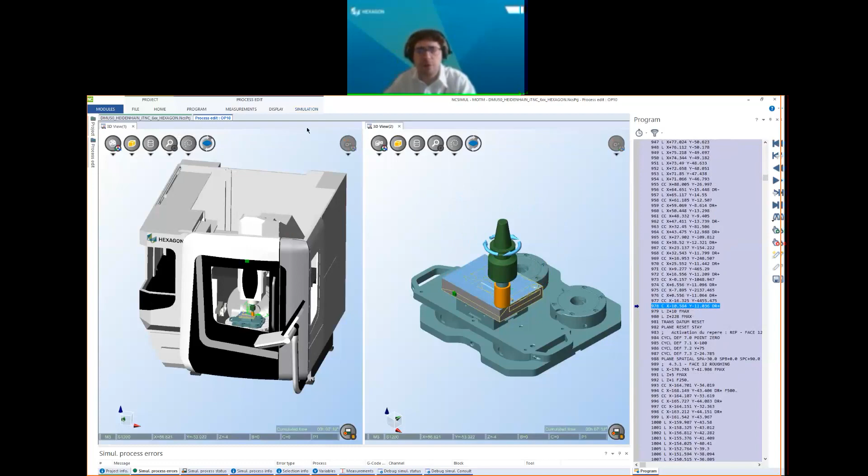And yes, the process is the same for the Heidenhain controller, and I will just open the same project with the Heidenhain controller. This is the same project, same machine, but as you can see on the right, my NC code is now Heidenhain conversational. You can see the L and the C here. Here we have the PLANE SPATIAL. We can also read Heidenhain ISO, but that's another issue. I won't do the 1st and 2nd steps, but you see we have the same potential and the same simulation going on, the same project. So if your DMU is either Heidenhain or Siemens, it's the same steps. Perfect, thank you. And we can see here on the right that this is now the Heidenhain controller.

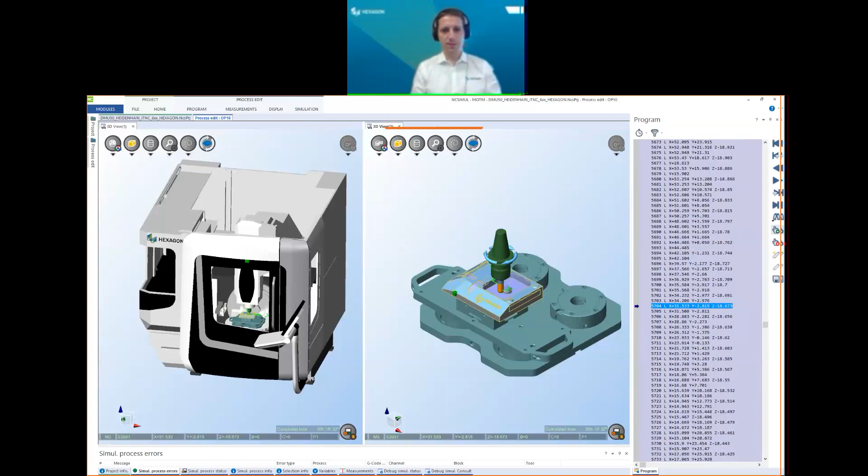G-code. Okay, thank you, Morgan. Thank you very much for this demonstration on this DMU 50.

I would like to take over now to talk a little bit about what kind of pricing we created for you for this special offer, machine of the month. So usually the NC Simul pricing for a 5-axis simultaneous machine like this DMG DMU50 would be to have one license, 1 year maintenance, the CAM interface from Hexagon, and develop the machine digital twin to customize it based on your requirements, and finally install it and train you. And we would be roughly on a budget around 17K euros.

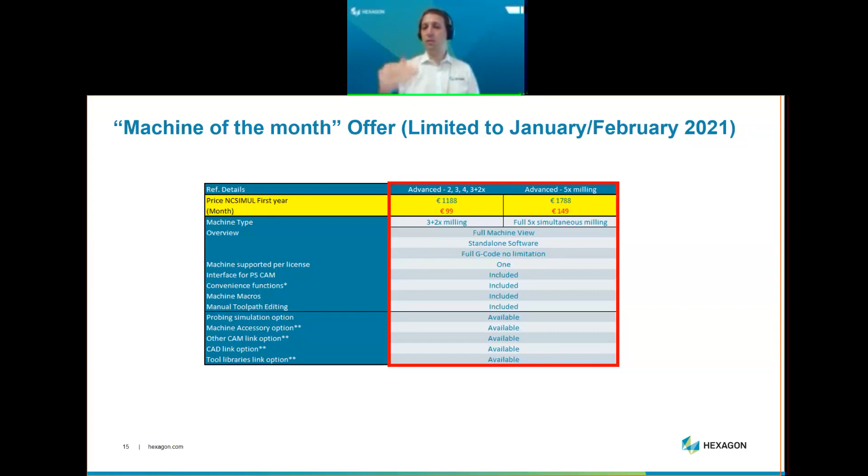For this machine of the month here, we created a very special and limited offer, limited to January and February for this DMG DMU50, where we are going to put in place the subscription. So depending if the machine is 3+2 axis or 5-axis simultaneous, with exactly the same features and benefits that you would get from using the license from NC Simul machine, dedicated to this DMG DMU50. So from 99 euros per month, you have all those functions, all those features.

And of course, you can also add some services. For example, you want the starter kit to have someone to help you to install the license, to install the software, to import the machine, and really to be ready to verify some programs, or to have advanced online training. At this moment, it's a little bit difficult to travel, so we have created online training for you to use NC Simul and to be proficient, that you can request to your local Hexagon office or to your partner or reseller of NC Simul. So from 99 euros per month, you can have access to this digital twin.

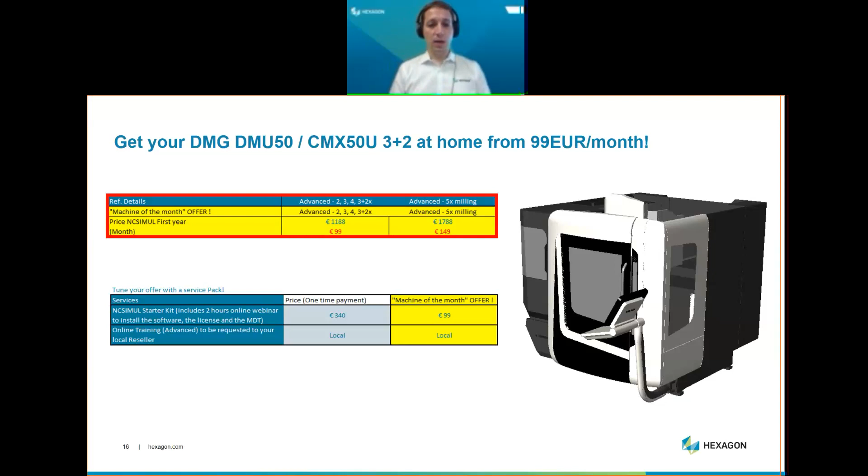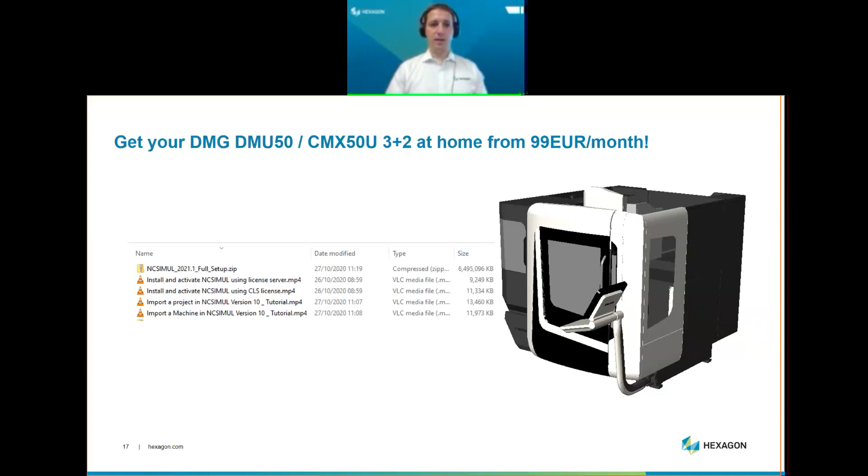And what do you get when you decide to purchase this digital twin here? You get the full NC Simul setup. So this is the software, videos on how to install, license, import machine, and install the software. And finally, of course, as we can see here on the right, the digital twin that is related to your needs in Siemens controller, in Heidenhain controller, DMU 50 first or third generation, or CMX 50. So this is what we provide in this offer.

To finish, and in a nutshell, to understand the customer feedback, NC Simul is easy to use. The customers are also very interested by this 3-step process, which is following exactly the same process that we have in the workshop to verify all the macros, subprograms, cycles, subroutines from the controller, from the CNC machine directly. Simulate all those programs very fast, not to lose time on the simulation, and with a very clear 3D visualization, where Morgan showed us we can pan, we can move, we can turn around. There won't be any lagging inside the visualization of this digital twin, with a very short learning curve.

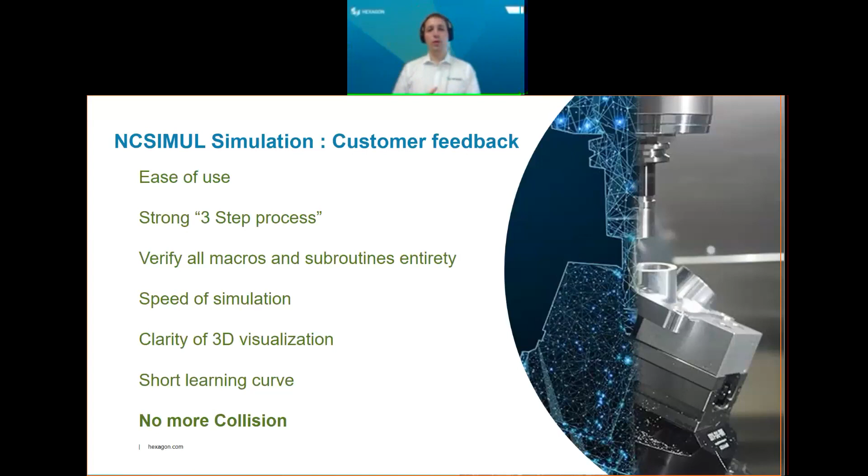And last but not least, no more collisions are expected in the workshop after using NC Simul digital twin to bring, I would say, the digital world into the real world. This is going to conclude.